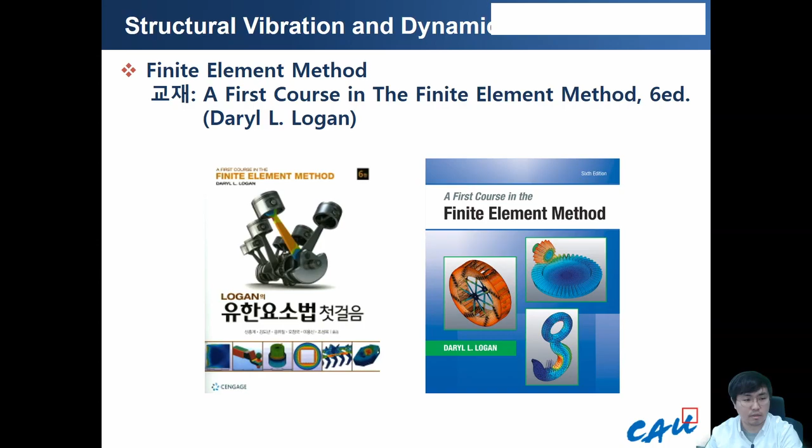So maybe we are going to spend two more weeks, so please follow the details. These contents are included in chapter 16, but I cannot give you very complex problems. However, it will be very helpful when you understand this concept. You can easily answer the problem when you are in an interview for the job market.

I think Professor O already taught you what vibration is. However, today I'm going to very briefly introduce the basic equations of structural dynamics, from the single degree of freedom to the multi degree of freedom system. Vibration is very important because it can result in malfunction or breakdown of machines, and also result in unbalances or misalignment, so it makes a lot of trouble when you handle mechanical components.

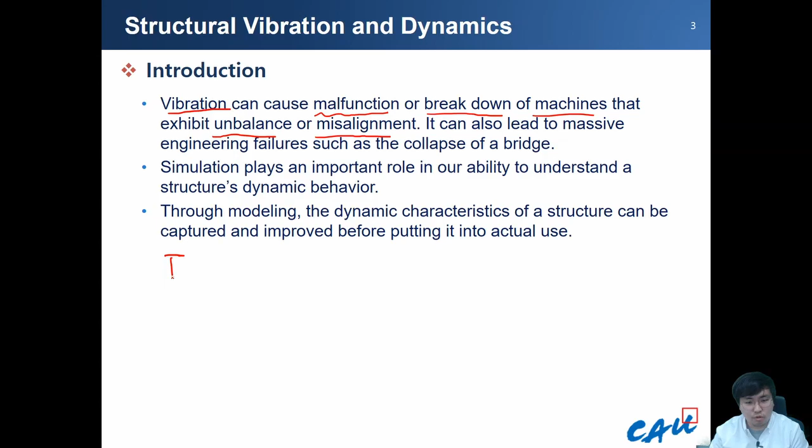However, we cannot catch vibration with our eyes. So simulation plays a very important role in understanding structural dynamics behavior. I think you already learned about vibration or dynamics in analytical formulation. However, FEM is one of the strong candidate simulation methods for understanding dynamics, because in Professor O's lecture, he also introduced degree of freedom systems.

At that time, masses are considered point masses, so it's very similar to a specific node; point masses are equivalent to nodes. That means the matrix equation has the same form as our FEM matrix equation, more specifically the stiffness equation. So I think you already know about the dynamics equation in the FEM formulation.

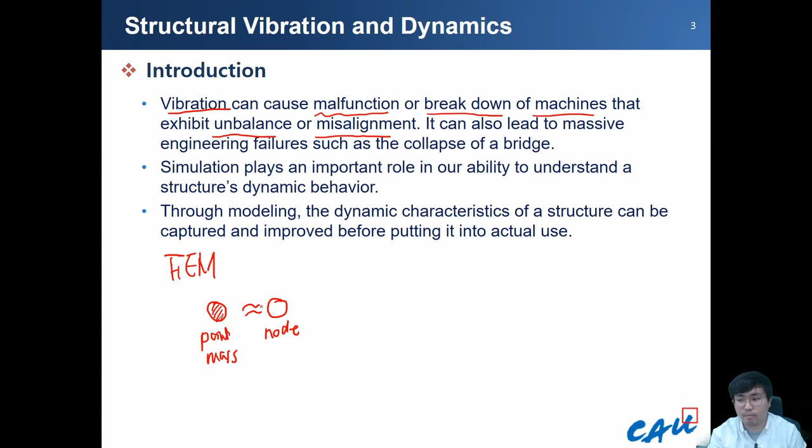Before we start, we should know the three different types of dynamics problems. First is modal analysis. Second is frequency response analysis. Third is transient response analysis. Among them, the transient analysis, I already showed you some beam transient behavior using the COMSOL simulation. This transient response is the dynamic response due to arbitrary external forces. When you apply arbitrary forces here, the beam will bend and then fluctuate depending on the forces. However, this transient response analysis takes a lot of time to obtain the solution and needs high computational power.

Actually, in our 1D cases, you can easily obtain it. However, just think about a very complex 3D structure. At that time, we have a lot of degrees of freedom, and it takes a lot of time. In static analysis, we only solve one single case. However, transient analysis means that we should solve this equation every time step, from t equal t0 to t equal tn. So you should solve this equation too many times, so time transient analysis needs a lot of computational time.

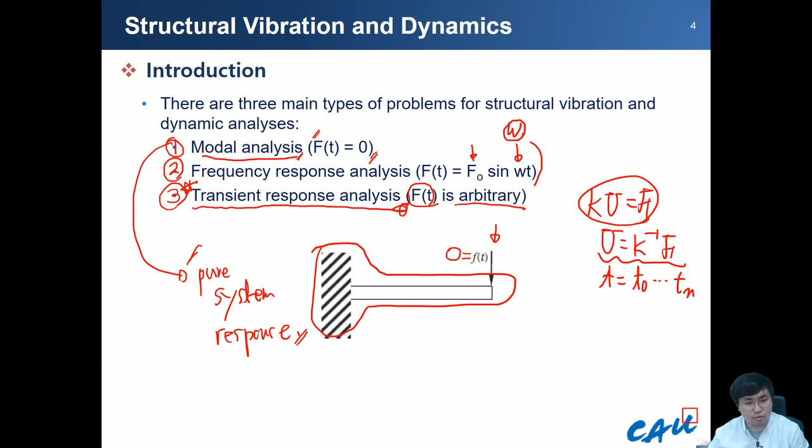Due to the existence of the external forces, these external forces vary as a function of time. However, here all forces are equal to 0. That means it looks like a static case, so we don't need to spend a lot of computational cost in the modal analysis. That means you can easily obtain a solution using modal analysis. So before you start the transient response analysis, modal analysis and then frequency response analysis must be done before you do the third, transient response analysis.

So this is a review of the basic equation of dynamics. First is a single degree of freedom system. A mass is attached with a spring and damper to the wall, and then we apply some force on the right hand side. Here M is mass, K is stiffness, C is damping, and F is force. So here this is a free body diagram. You can easily draw the mass, and then in the right hand direction we have some external forces.

On the left hand side, due to the spring and damper, we have the force Ku. The spring force is proportional to the displacement, and the damper force is proportional to the velocity of the mass. So based on this, you can easily make the dynamics equation. First, F equals ma, and a can be represented by the second derivative of displacement, but for convenience we use this notation, where the dot means the first time derivative. So this is a force equilibrium equation, but in the static equation we can neglect acceleration and velocity, so F equals Ku is our main governing equation.

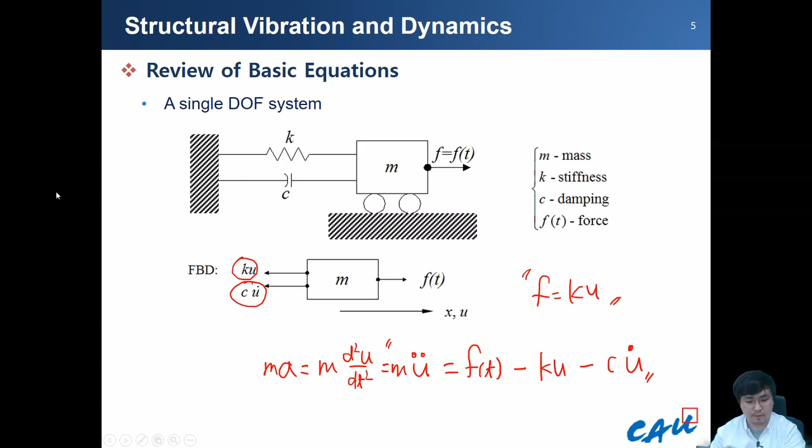So this is the main governing equation in the dynamic analysis of a single body system. This is a very simple ordinary differential equation, so I think you can easily obtain the solution as a function of time. You can expect an exponential term, depending on the forces: the homogeneous solution and particular solution, u_h and u_p. That was your engineering mathematics in your freshman years.

Anyway, due to the complexity, we are going to neglect the damping coefficient, so there is no damping in this system. First, let's consider free vibration. Free vibration means we don't apply any forces in this system. Finally we obtain this very simple free vibration equation. To solve this equation, we assume a solution depending on your system. You can assume an exponential form, but here the sine is enough to match this result.

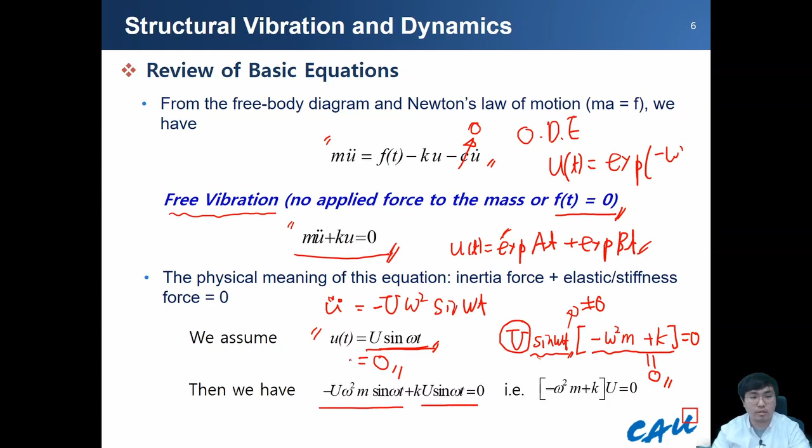However, in the previous slide we assumed that the solution followed this result. When capital U equals 0, the total solution becomes 0. We don't need that kind of result. We say this is a vibration motion, dynamic motion, so we should obtain the displacement as a function of time. But here there is no movement, so we don't need that kind of trivial solution.

So we must match that relationship, and then this omega, the frequency here, must be equal to this. This is the natural frequency. We call it the natural frequency of the single degree of freedom system.

So when you apply some force at the same natural frequency, in the previous slide, in free vibration we assumed the external force is equal to 0. However, when we apply the same frequency, it looks like the harmonic response in the second case. At that time we can meet some resonance behavior.

Anyway, in the free vibration mode, the solutions look like this. This is the frequency of this free body diagram. U is a non-trivial arbitrary value depending on the initial condition. You can easily obtain these solutions.

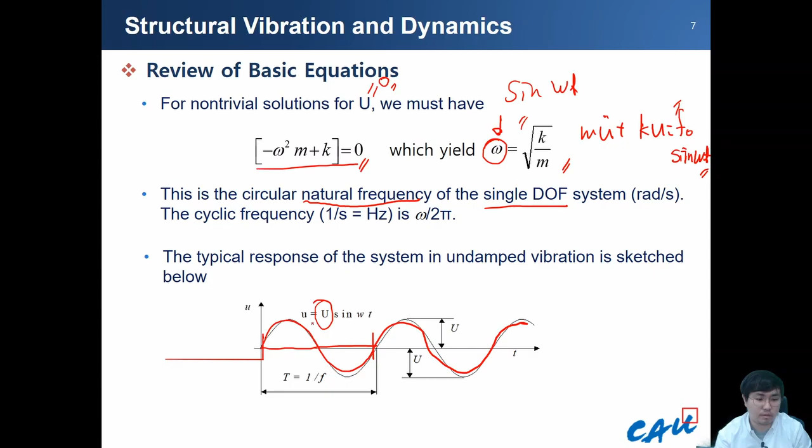However, in structural analysis, if the damping coefficient is below 0.15, we assume that the damped frequencies are similar to the natural frequencies. Although I do not explain in more detail, we can ignore the damping system. At that time we assume a very simple natural frequency system.

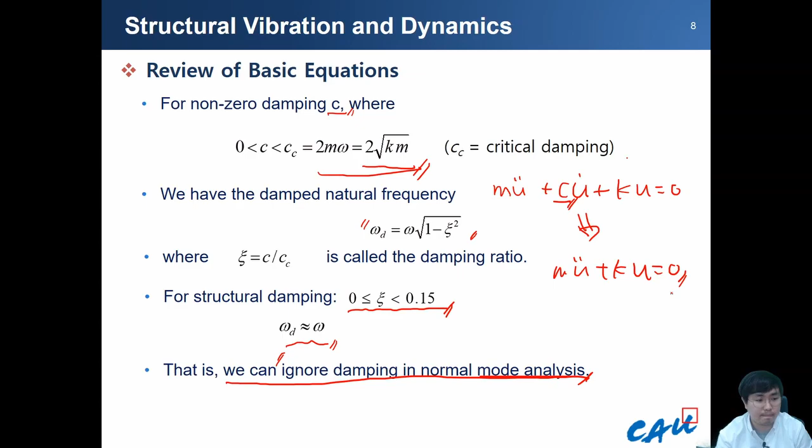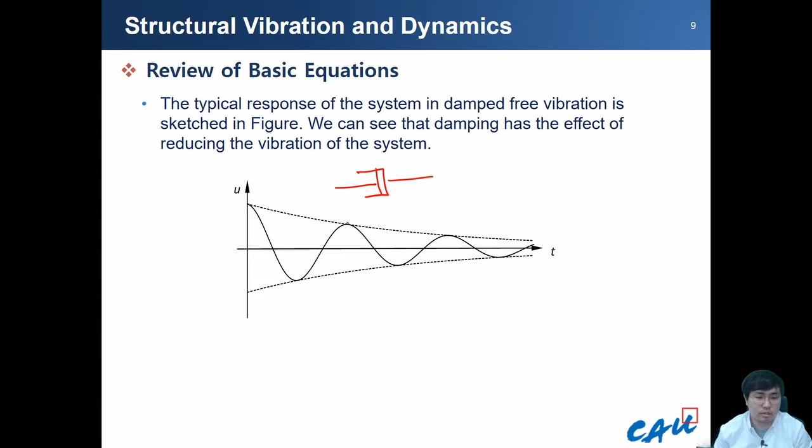Due to the damping coefficient, the responses actually look like this. The magnitude of the vibration decreases. This is the role of the damping coefficient. It is because this damper generates forces in the opposite direction of the velocity. So this damper will decrease the magnitude of the vibrations. Anyway, let's go to the next.

Let's consider the multi-degree of freedom system. Although we are going to consider more degrees of freedom, the equations have the same form here. M is the mass, u double dot is the acceleration, c is the damping, and k is the stiffness.

However, u has a vector form depending on your system. If we have a truss element system or a 2D system, we should add variables like v here, so depending on your system, u has a vector form. That means k is the stiffness matrix, and similarly damping changes to matrix form, and the mass also has a matrix form. So these equations are slightly different compared to the single degree of freedom system.

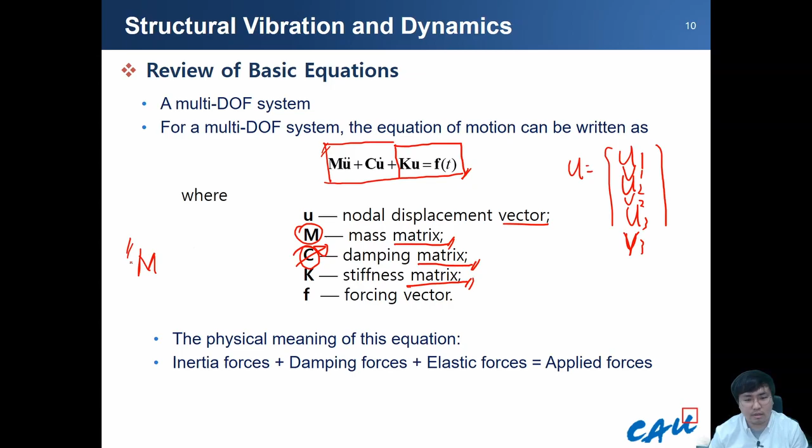You can easily see this part, f equals ku. However, here we should first define the mass matrices and damping matrices. We usually neglect damping matrices, but we cannot neglect mass matrices. So here we are going to learn how to define the mass matrices for the FEM simulation.

Here, mass. First we should consider the mass matrices. To define the mass matrix, we have two different types of mass matrices. First is lumped mass matrices. Second is consistent mass matrices.

First, lumped mass matrices are more empirical and easier to determine, or you can easily understand lumped mass matrices. However, the second one, consistent mass matrices, are derived using our shape functions or some analytical formulation. So it's more accurate than lumped mass matrices. However, this time you can easily derive the consistent mass matrices too. But let's handle the lumped mass matrices first.

Let's begin with the truss element first. We have two nodes and 2 degrees of freedom. This displacement element has a specific length and cross-section area. To know the mass, we should know the density of this truss element first. How can we obtain the total mass? You know the density, so you should know the total volume. What is the volume? Here, volume is the cross-section area multiplied by the length. This is the total mass of this truss element.

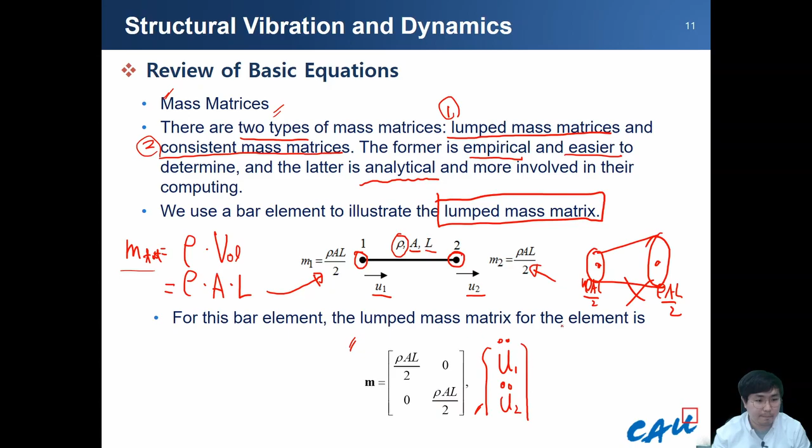These masses can be transformed to matrix form, and here we are going to apply the accelerations separately. There are no coupled terms in the first or second equation. So this is how we determine the lumped mass matrix. And then second is

the consistent mass matrix. The consistent matrix has an analytical formulation. You can easily think about what the total mass is: density integrated over the whole volume. So this can be the total volume. However, here we have some problem. Why? What is this one? N is a shape function. In the FEM method, we already learned several different types of shape functions depending on your system.

But here, after multiplying the transposed shape function and the shape function, they return a matrix. Then after integrating this shape function, you can obtain the consistent mass matrix. This shape function is a function of x, y or z. Generally in 1D cases this function is a function of x only. But in our stiffness matrix equation, the derivative of the shape function becomes a constant value, not a function of the axis. However, here they are a function of the axis. That means we should take some numerical integration here. But this is next work.

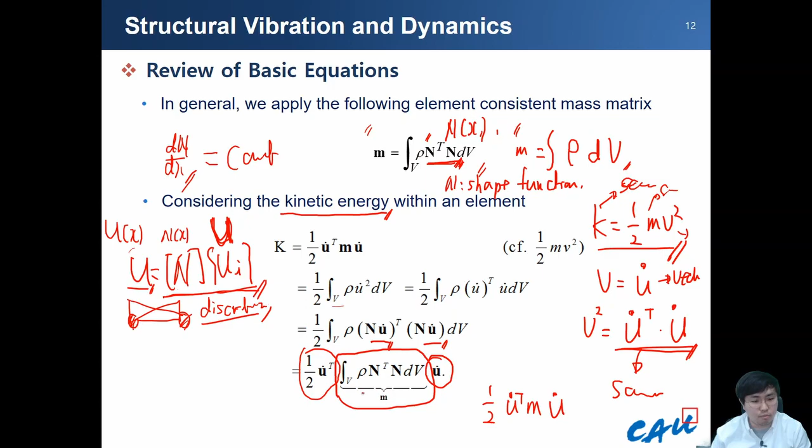Anyway, let's begin the lecture again. The velocity u can be discretized like this, and then after applying the transpose, here this is the velocity of the system, and the remaining part is equivalent to the mass, so in that way we define the consistent mass matrix like this.

So let's consider the truss element. In the truss element, how can we define it? The shape functions look like this, and for convenience we are going to use this shape function. The xi has these ranges, so after the multiplication they become these matrices. And the total volume can be changed to the cross-section area times the total length.

Slightly wrong. Anyway, this is the total xi, so this is the total volume, so you need the integration from 0 to 1 of rho A. Sorry, I think this is correct. It is because they mapped this element to 0 to 1 from 0 to L, so L is the Jacobian here. So this is correct. Finally we obtain the mass matrix, exactly rho A L over 6 times [2 1; 1 2].

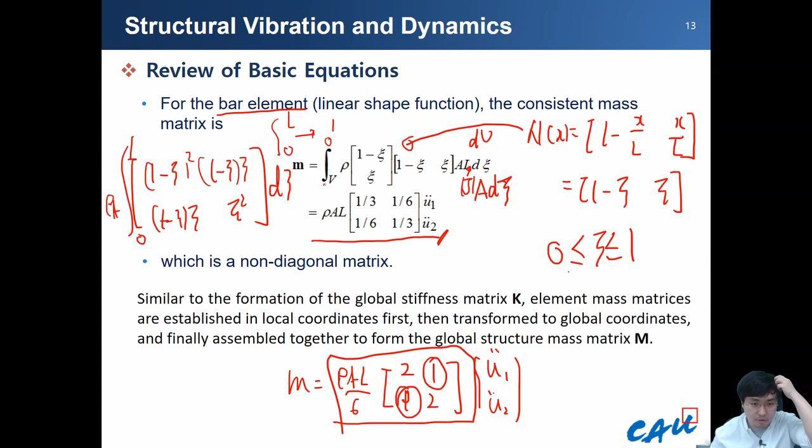However, if they have a different cross-section area, although we need more cost to integrate these parts, you can obtain a more accurate mass matrix compared to the lumped mass matrix. This is how we define the element. Now let's consider the beam element.